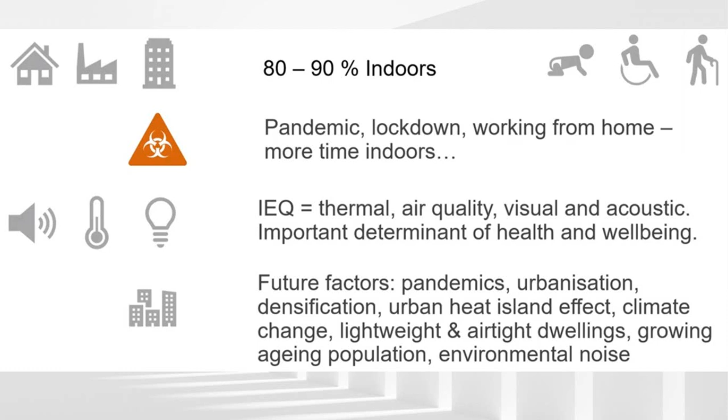In our modern lifestyle, people spend between 80 to 90% of their time daily inside buildings such as homes, offices, schools, doing many activities.

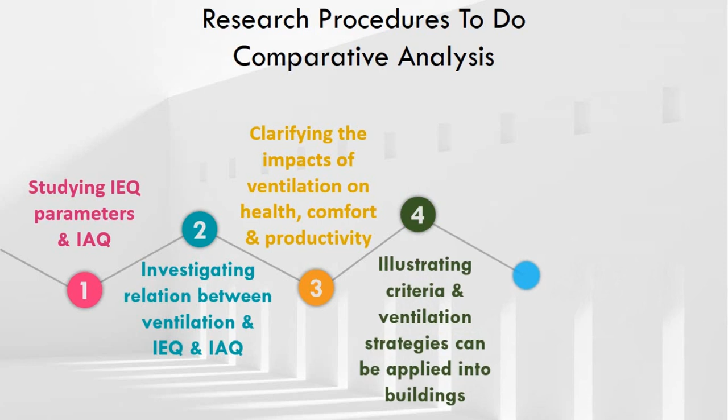To analyze such comparative study and achieve its aims by studying indoor environmental quality parameters and indoor air quality and its relation with ventilation, human health and thermal comfort, which reflect directly on human performance and productivity.

To find best ventilation strategies and criteria by studying 3 international examples and analyzing 2 case studies to reach a clear guideline for improving indoor environmental quality and implementing the most effective ventilation criteria.

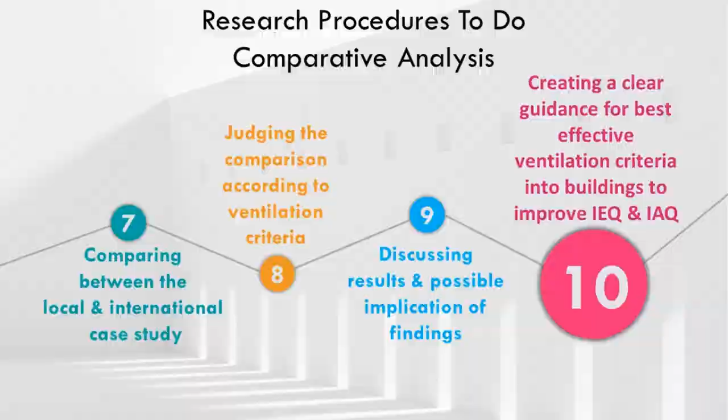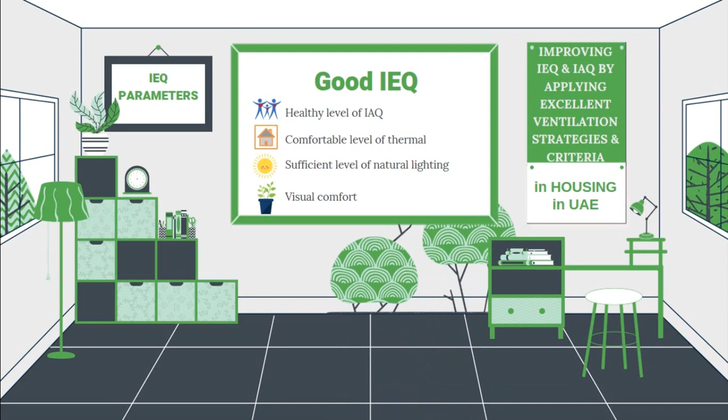The importance of studying the impacts of ventilation as a significant factor that affects directly indoor environmental parameters to achieve a healthy level of indoor air quality and sufficient levels of thermal comfort, especially in the housing sector to protect human health and enhance their indoor performance and productivity.

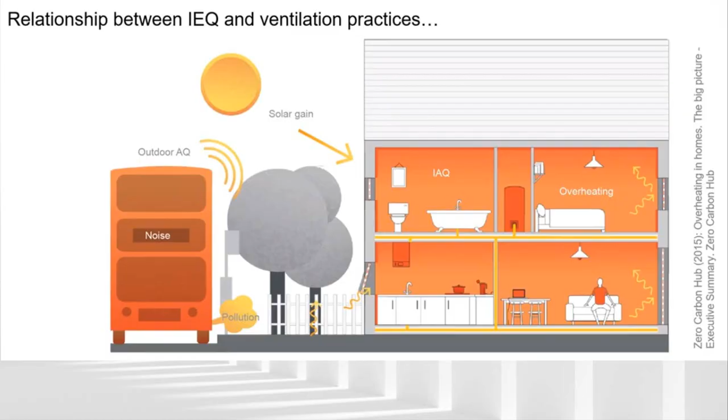Ventilation is an important modifier of indoor environmental quality and has a relationship with overheating, indoor air quality, human health and thermal comfort. Ventilation allows exchange between inside and outside of homes. This allows control of air quality and contaminants from internal sources. In addition, it controls temperatures and humidity to reduce the health risks and reach the well-being threshold.

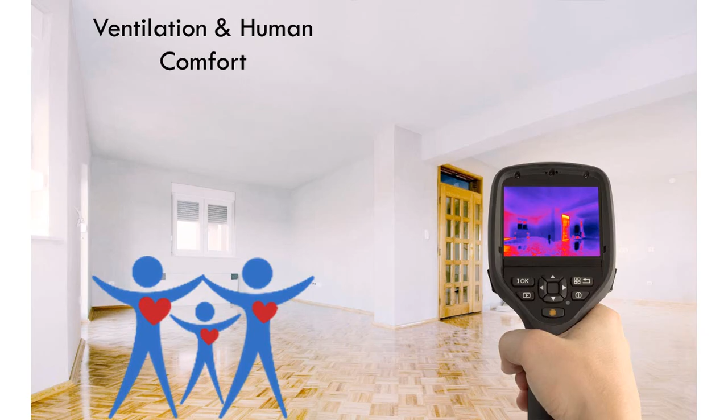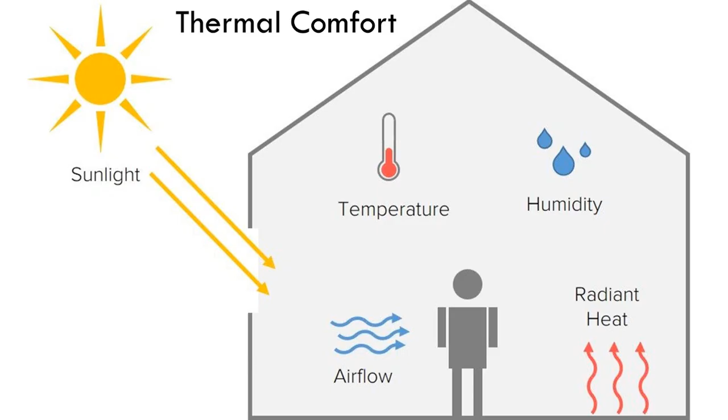According to ASHRAE 55 standards, the ideal thermal comfort zone in homes falls within 30 to 70% relative humidity and temperatures between 20 to 24 degrees, depending on air velocity. If conditions fall out of the comfort zone and air is still without any exchange, our bodies respond to it.

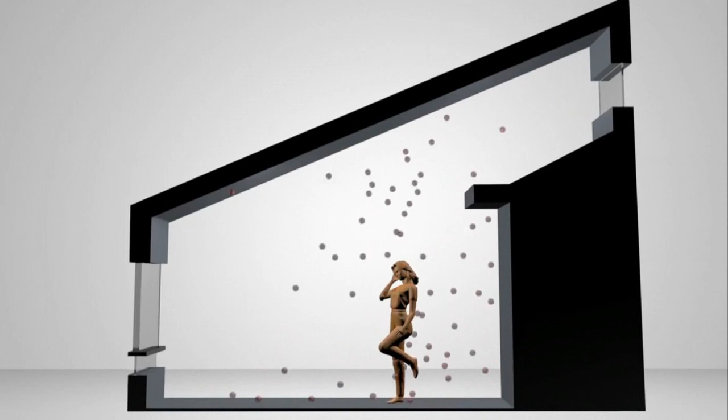It is possible that when the air is calm and the temperature cool, but the humidity is high, we will still feel warm because high humidity slows down the evaporation of our sweat. Our bodies generate heat every second. If the heat cannot be released to cool air, we feel hot.

Heat is taken away by airflow around our bodies, turning the sweat from liquid to vapor. If the surrounding humidity is lower or the temperature is lower or the surrounding air movement is quicker, or any combination of them, the cooling effect will be faster.

To measure the range of indoor thermal comfort, researchers developed the PMV scale, predicted mean vote, by using 2 essential parameters, air velocity and air temperature, both parameters directly related to the ventilation system.

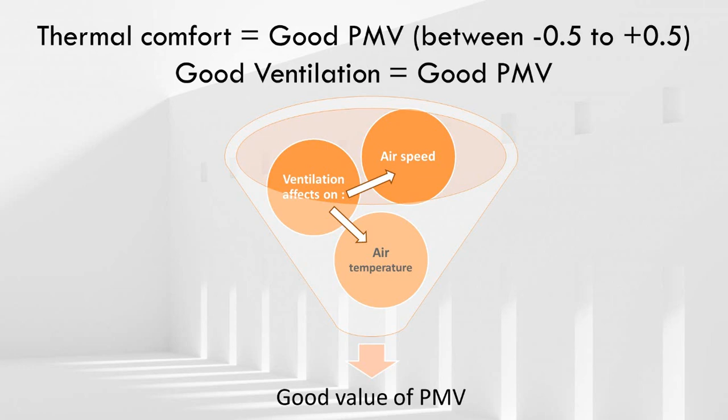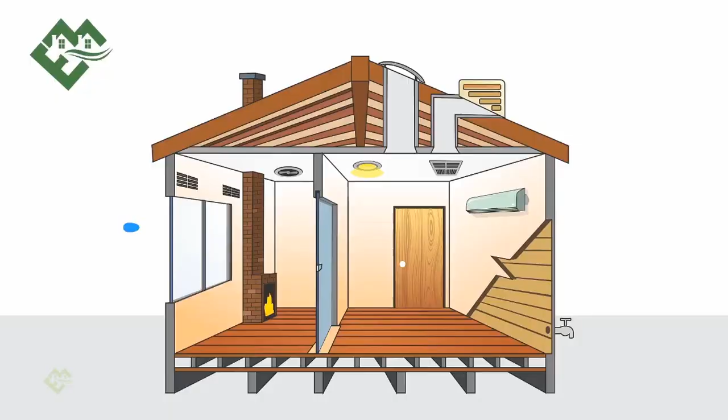In hot and humid countries, the summer is a harsh season. We block doors and windows because of hotness and high humidity. Actually, we also block air exchange, which means we breathe only the trapped air in the indoor spaces. As we breathe in oxygen and breathe out CO2, the percentage of oxygen will be lower. You may feel sleepy or lazy because of the high percentage of carbon dioxide.

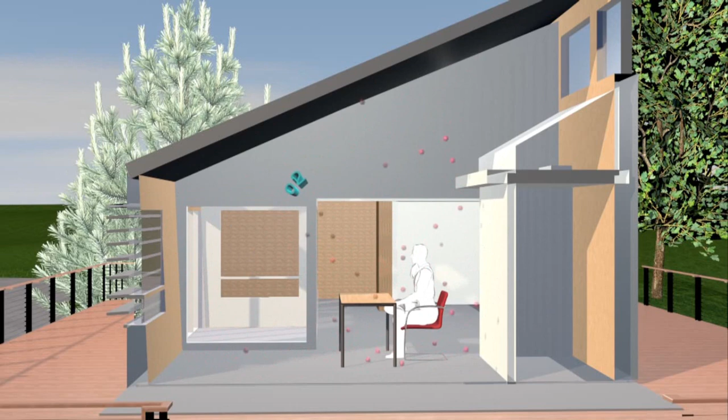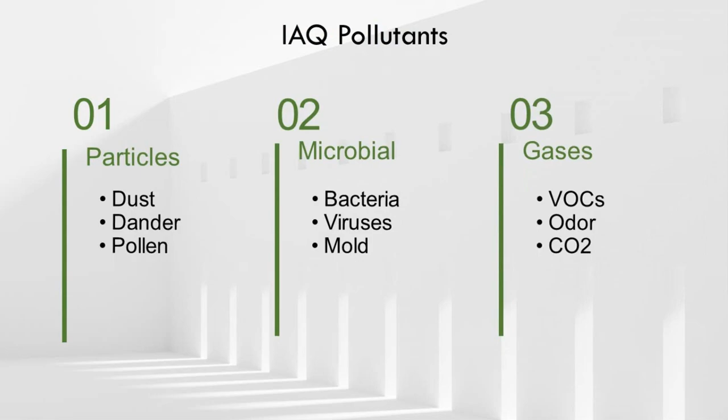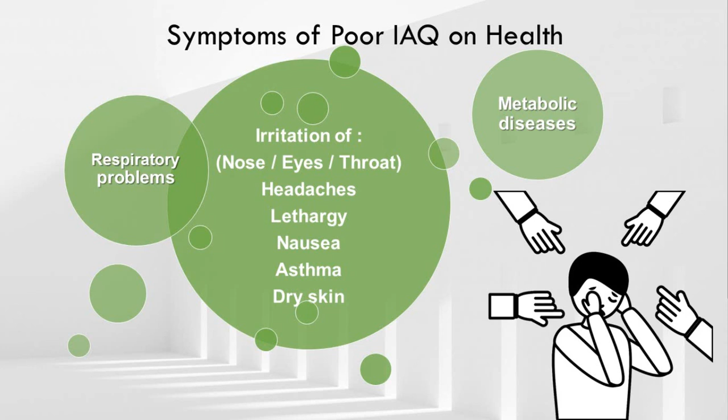At the same time, your furniture and home's building materials are releasing contaminants. Indoor air pollution is considered one of the highest 5 health hazards reported by the US EPA, US Environmental Protection Agency. Poor indoor air quality has notable negative impacts on human health. It appears through many symptoms such as headaches, irritation of the nose, eyes, and throat, lethargy, nausea, asthma, and dry skin.

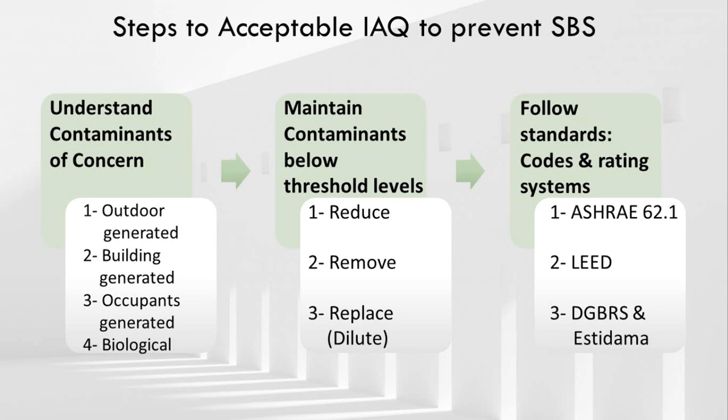An awful ventilation system inside occupied buildings can easily cause SBS, sick building syndrome, and several illnesses such as metabolic diseases, respiratory problems, and poor human performance, and make the occupants less productive due to prolonged exposure to poor indoor air quality. The ventilation system directly affects the fresh air supply and indoor air quality. Therefore, ventilation quality directly affects human health and thermal comfort.

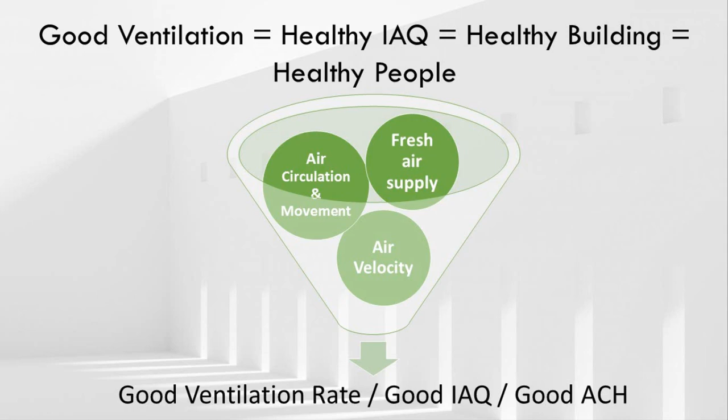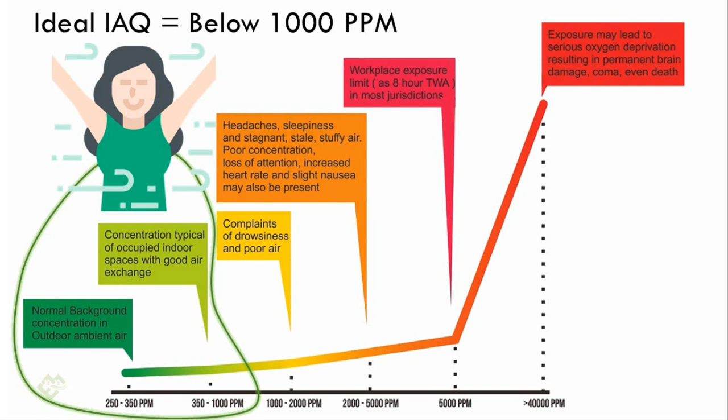As a result, a well-ventilated indoor space in a healthy building can make people more energetic, productive, and have good mental and psychological well-being, reflecting on their health, external and internal comfort.

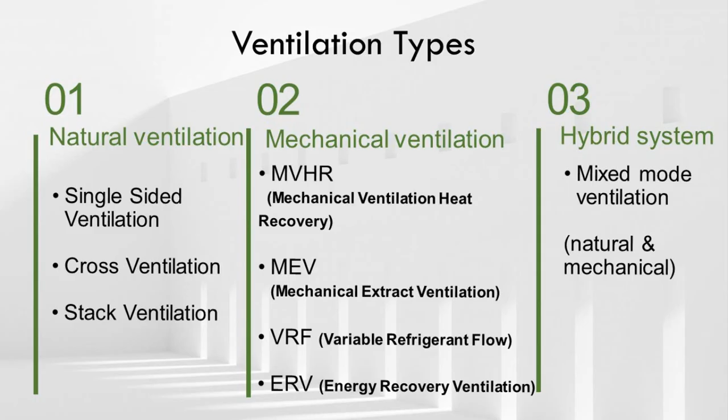There are many types of cooling and ventilation systems, offering various levels of dehumidification, filtering, cooling, recovery, and choice of fresh air source. The primary function is to supply sufficient fresh air to maintain indoor air quality.

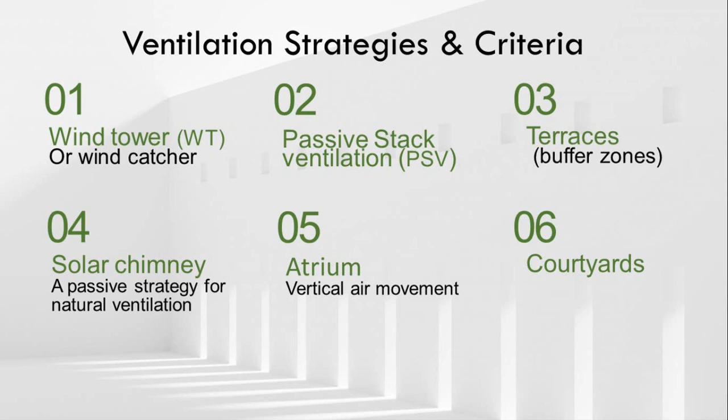Moving on to the first example. The surrounding site works like a small oasis ecosystem, providing water, plants, and buffer zones. The house is designed with large windows to create a cross-ventilation system through all rooms.

The applied strategies to improve the cross-ventilation mechanism: 3 courtyards, a long and tight terrace, large windows, pergolas, and pools. The courtyards in 3 different directions work as a passive cooling strategy to reduce humidity and create differences between indoor and outdoor temperatures.

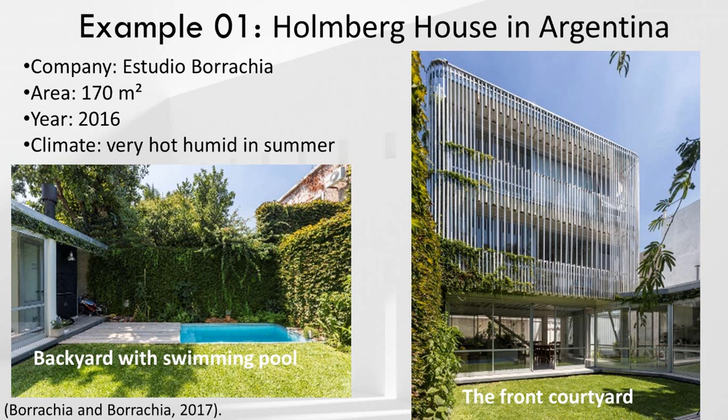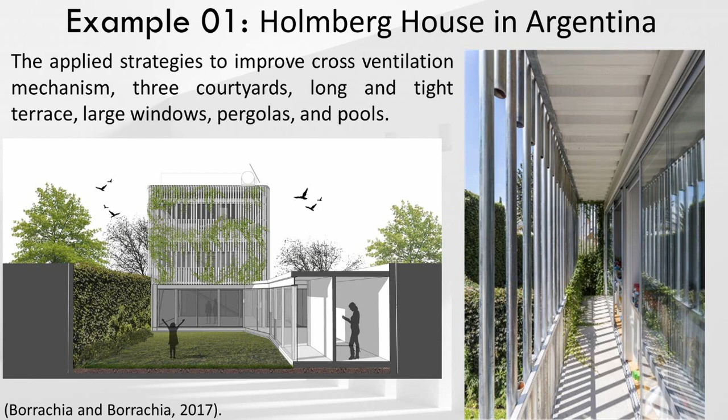The shaded long terrace in the upper floor works as a buffer zone to increase airflow and air circulation. When the air velocity goes up, it will affect indoor temperature, maintain the PMV value and improve indoor air quality as a result of decreasing the contaminants and a high rate of air exchange.

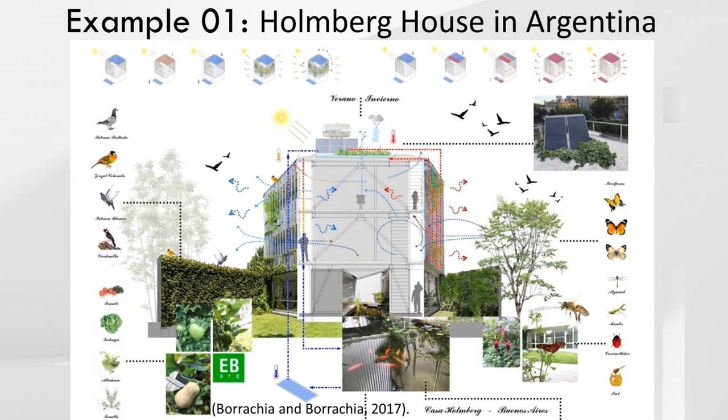Also, large windows will allow more air volume to pass into indoor spaces and achieve cross-ventilation requirements. Finally, pools work as evaporative cooling surfaces, which decrease the surrounding temperature before it goes inside the home. Moving on to the second example.

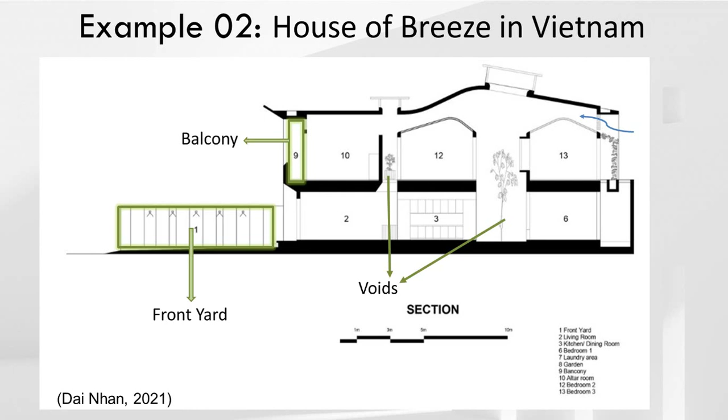To ensure indoor environmental quality and family members' well-being, sustainable solutions and analysis of building physics were applied to the house using passive design to optimize the indoor environment and reduce energy consumption. The air movement is designed to continue inside the building vertically via atriums and horizontally by ventilation brick blocks and openings, using the buffer spaces to increase the relative humidity to maintain the indoor environment within comfortable levels, which naturally reduces the need for AC and fans.

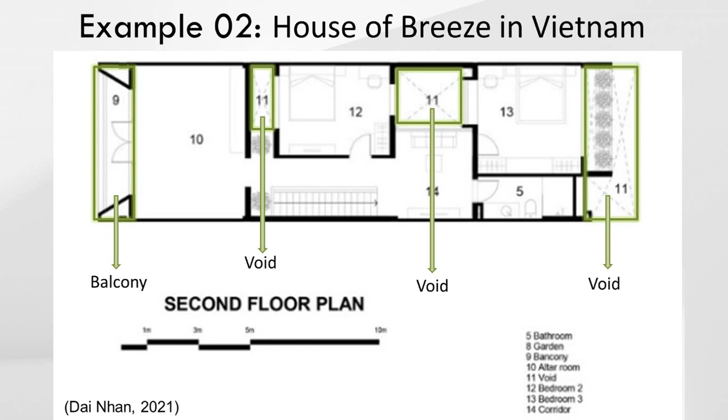The house design has greenery areas in both the front yard and backyard to control air quality by using the yards as multi-layered filters, a green filter system to decrease harmful smoke and dust from the house's surroundings. To protect the indoor spaces from air pollutants, green filters are also applied inside the kitchens and toilets. After applying the strategies, indoor air quality is considered safe and clean for occupants' health. Moving on to the third example.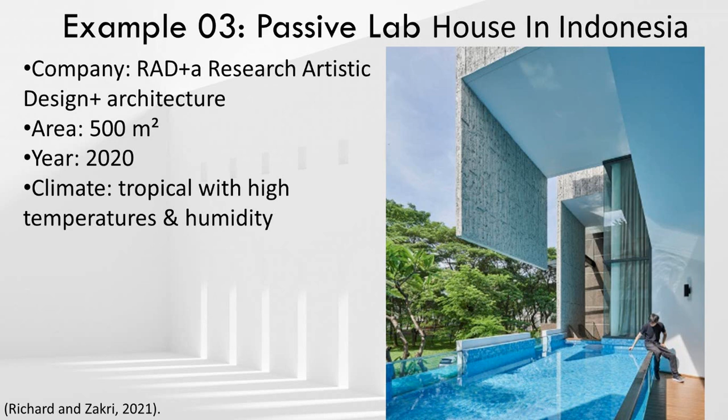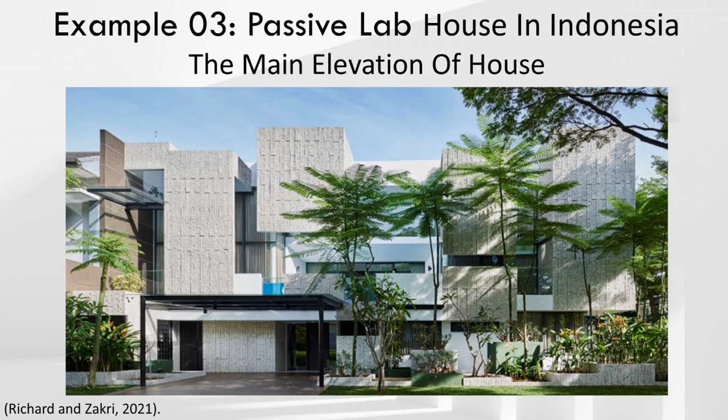Passive Lab House used simple passive strategies to arrange the spaces and reduce the indoor temperature by 4 Celsius degrees and maintain the indoor air velocity and humidity. The project has many overlapped void spaces to ensure accurate work of natural ventilation. Slight indoor ramps are designed for vertical circulation and work as a wind chimney by putting a reflective pool under it and a tripled volume with an upper skylight with airflow openings.

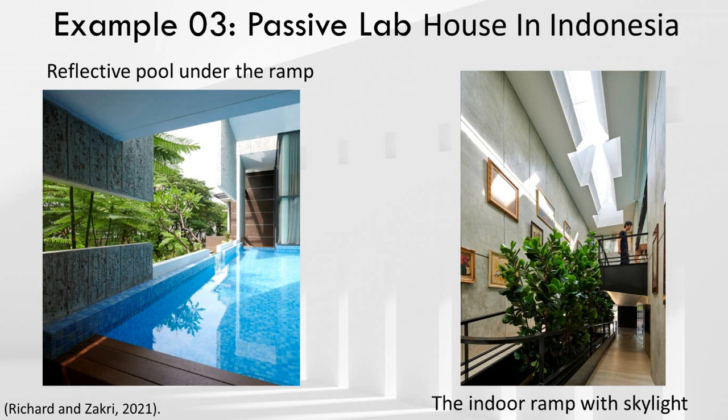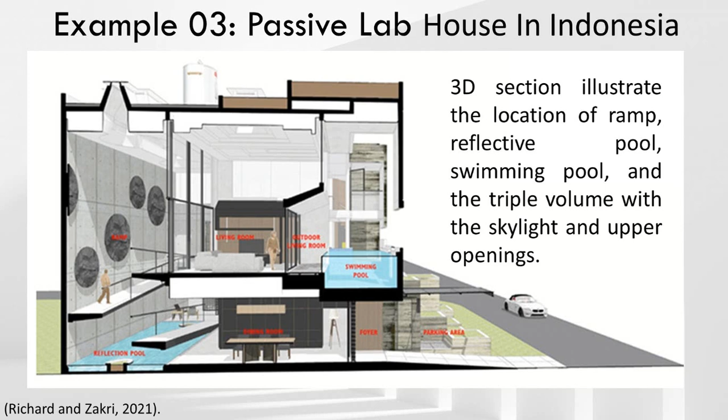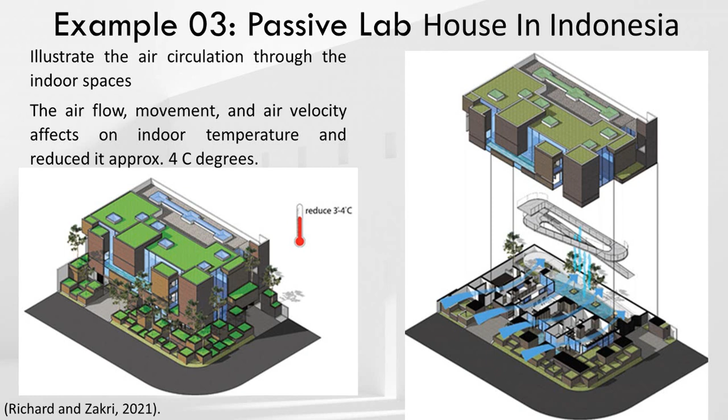The effects of the pool will be high air pressure, low temperature, and high humidity. In contrast, the effect of the skylight and openings will be low air pressure, high temperature, and low humidity. Indoor airflow will work passively by releasing the hot air by water and flowing vertically to the upper openings in continuous movement. This will keep the indoor air fresh and clean, with good quality suitable for occupants' health.

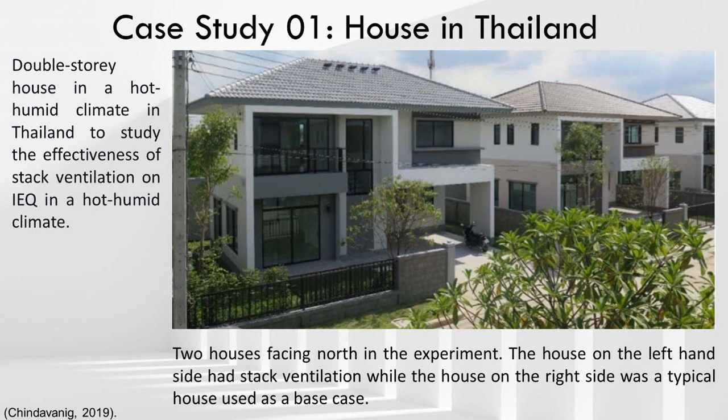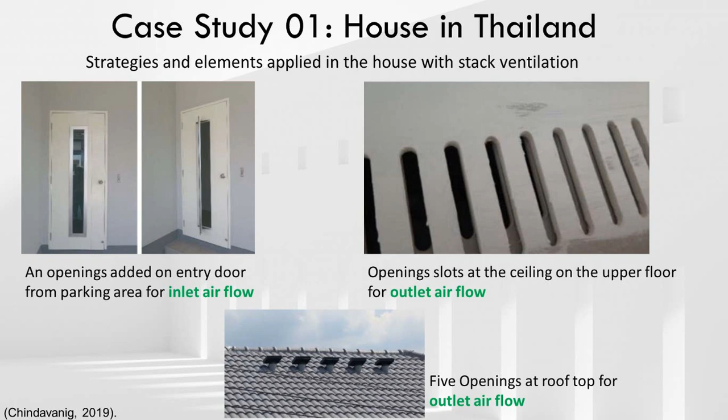The first case study research selected a double-story house in a hot humid climate in Thailand to study the effectiveness of stack ventilation on indoor environmental quality by adding an opening in the entry door and extra openings at the rooftop to create high differences between outdoor and indoor air temperatures and relative humidity, generating buoyancy for a stack ventilation system. Air temperatures, wind speed, and humidity were measured using scientific instruments inside both houses to calculate accurate data and study the differences between cases.

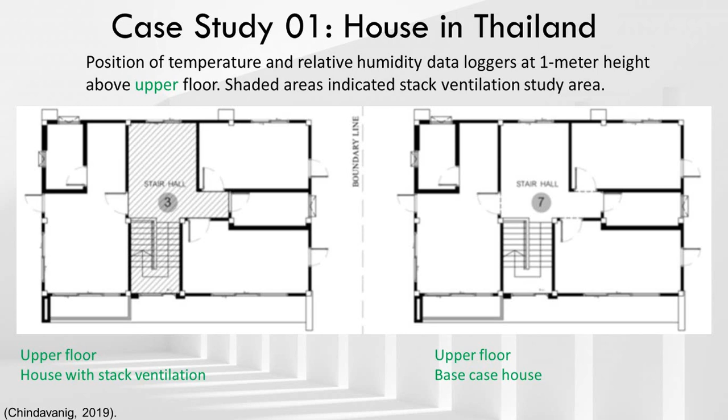As a result, the house with a stack ventilation approach has a lower indoor air temperature of about 1.7 Celsius and about 12% lower humidity than the base case house. Stack ventilation can reach 1.03 air changes per hour if only 0.1% of the area of building openings have stack ventilation.

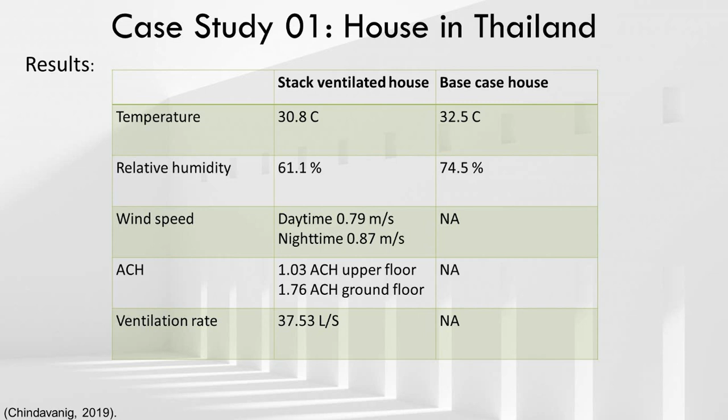Moving to the second case study, Madinat Jumeirah village in Dubai has courtyard summer houses called Dar al-Masyaf. Madinat Jumeirah forms a virtual island looking down upon wind towers, courtyard houses and pools. The combination of green design techniques used in the project will not only reduce energy consumption and environmental impact, but also reduce running costs, create more pleasant indoor spaces, improve occupants' health, and reduce pollution.

Design strategies that minimize the need for mechanical cooling systems were adopted, including proper shading, natural ventilation, thermal mass, careful siting and orientation decisions, and good landscaping. Natural ventilation is applied by the wind tower and courtyards, using the passive stack effect and pressure differential to bring fresh cooling air through buildings with limited or no mechanical systems. This strategy has been adapted by incorporating different means of outdoor air intake, including operable windows.

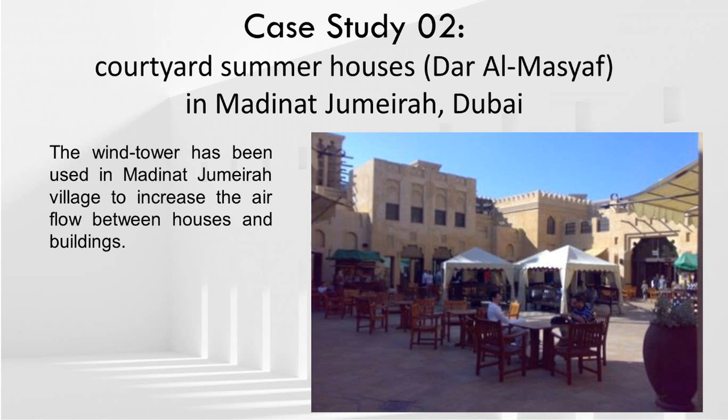The wind tower has been used in Madinat Jumeirah to increase the airflow in buildings. Other features include fresh air inlets located near floor level, and the use of atriums and courtyards that have been adapted to enhance the stack effect and to speed the indoor airflow.